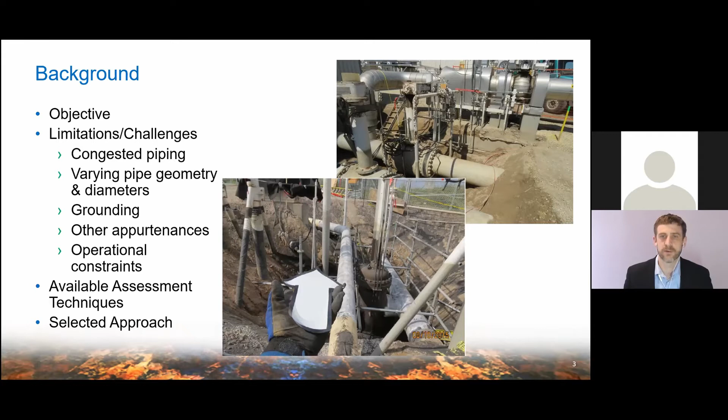So that sort of leaves the ECDA type approach, and that's the approach that was selected. It does have challenges with grounding, it has challenges with congested piping, but they're less fundamental issues in terms of being able to actually do them. So we'll look at what those challenges are in the coming slides. Now the ECDA is described in NACE SP 0502. It's a 4-step process. Many of you would be familiar with it.

The pre-assessment is going to be a little different than on cross-country pipelines. Fundamentally, it's the same process, but there tend to be a lot more changes in a facility environment than there are on cross-country pipelines. So you may have multiple revisions of drawings, multiple iterations of compressor station A, then you add B, then you add C, then you take A out of service, and then you add aftercoolers. There are a lot of things that can happen, and all of those can involve piping changes, or you add new lines and you're changing the configuration of the piping. So capturing that takes extra effort, shall we say.

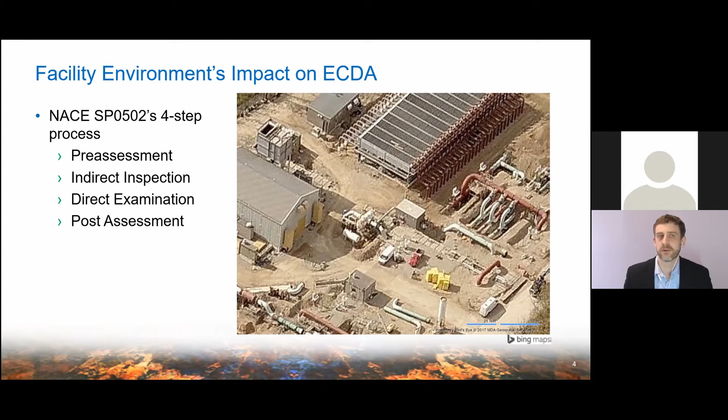The indirect inspection, we'll talk about some of the challenges in the coming slides. The direct examinations, they eliminate some of the challenges that you would normally experience with landowners and land access, but they introduce other challenges related to the environment. So you're going to be doing mostly or exclusively hydrovac excavations. You're going to be near buildings and have to worry about the integrity of those, not having much space when you're doing the digs. And then the post-assessment process is going to be similar, except it'll be based on the results from the other 3 steps.

Now, there were 2 small stations that were selected as a pilot program. And this is looking back 7 years now, but as I mentioned, the data that we have and the photos have been approved for public consumption. So that's really helpful to be able to share the findings. And it turns out that the pilot program was selected very well. So some of the challenges that we were looking at were represented in, for example, this slide here. So you can see we've got congested piping, we've got valves, there's isolation in these areas. Yes, it's a relatively small station, but it has those characteristics. It's got electrically continuous grounding as well.

Now, as a bit of background, when we were approached to do this, it was about a year or 2 after we were approached by a client to do compressor station surveys, CIPS and DCVG surveys in a compressor station. And at that point, we told the client, you're not going to get any useful data, but we can do it if you want. And they said, yeah, we know we're not going to get useful data, but we want to do it anyway. And we said, well, okay, we'll do it for you, but you're not going to get any useful data. And we did it, and they didn't get any useful data.

So then when we were approached again and they said, hey, there aren't really other good options, what are we going to do? And we said, okay, well, let's give it our best shot, and we'll look into leveraging our experience with stations. We've done a few surveys on the risers coming into stations. We know that the gradients are crazy. So we had to plan really carefully. And they also wanted a pretty quick turnaround. They basically wanted to dig right after doing the survey. So that was a bit of a challenge as well.

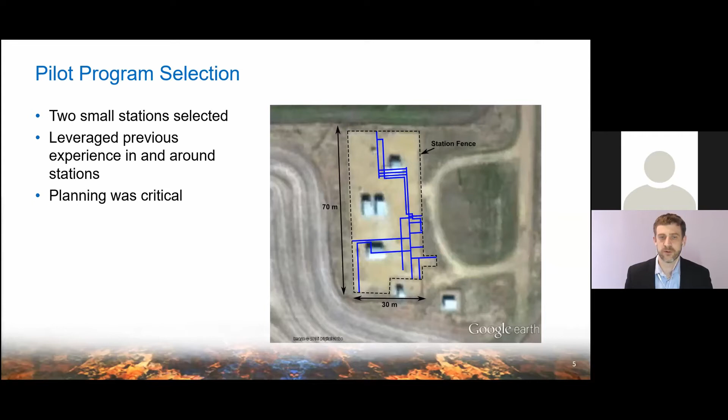So here are some of the challenges; it's really different than doing a cross-country survey. Cross-country survey, you've got issues with land access. You may have rivers and swamps and crossing fields with crops and that sort of thing. Here you don't have any of those challenges, but you have a very complex environment.

You may have ground contact issues if there's a lot of gravel. Some stations have a pretty thick layer of gravel in some spots in the stations. And you can see here, this is not so unusual. There are a lot of risers. The risers represent valves or blowdowns.

And these supports, for example, is this support contributing to a coating defect indication? You really have to find that out when you're on site because you can't tell after the fact. So skill of the technicians is absolutely critical to the success of this type of survey.

And it's critical that the technicians maintain a good awareness of the surroundings. So they need to know what's going on. They need to recognize if there are problems or potential problems, and then they have to act on them right away. The survey in a small station like this might take a day. So you need to be able to respond quickly, and you certainly don't want to come back because remobilizing is going to increase your costs dramatically.

But the office staff also need an awareness of the surroundings. So the tech not only has to pay attention themselves, they need to be able to convey that information back to the office. And then the office needs to provide prompt feedback because they're going to have a different visibility on the data, and they're going to need to be able to ask for more information, for clarification. The best technician can't see that as you have different gradients interacting. So it's really a team project, and both teams need to be on their game.

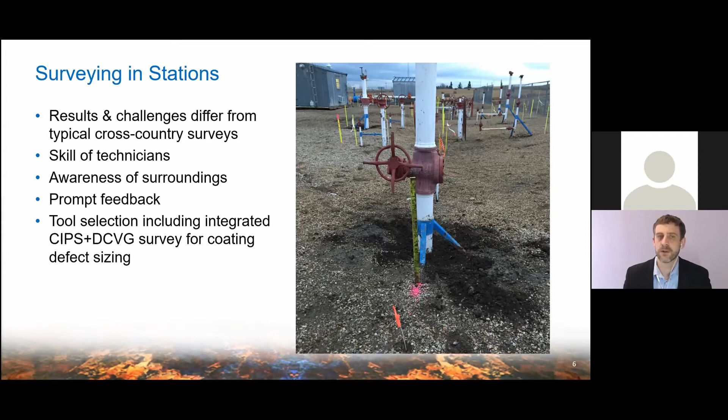Let's talk now. We're going to pivot a little bit. I want to give you some background on these techniques, the CIPS and the voltage gradient surveys. So the relevant NACE standards are TM0109, SP0502. For the ACVG and the DCVG, I've listed the ECDA standard here, but it's actually the old version because it gave some guidance for how you would classify indications.

And part of your job as the ECDA practitioner is to classify indications. And the old standard gave some guidance. The new standard pulled it out when the survey procedures got pulled out. So there's a little bit of a gap there, but you can refer to those documents.

Now, in terms of the voltage gradient test itself, this is basically the setup. You attach to your pipe and you apply a DC or AC voltage source, and then you discharge current from a temporary or permanent ground bed. And when you do that, you're going to have current which is discharged from the ground bed and picked up on the pipe. And this is basically what I'm trying to represent over here.

So this black mark is meant to represent a coating defect on my pipeline. And the blue rings and lines represent current and a voltage gradient in the soil. So around a coating defect, you have a concentration of current. That concentration of current passing through a resistive medium, soil, generates a voltage. And that voltage is what we're looking for when we do a survey.

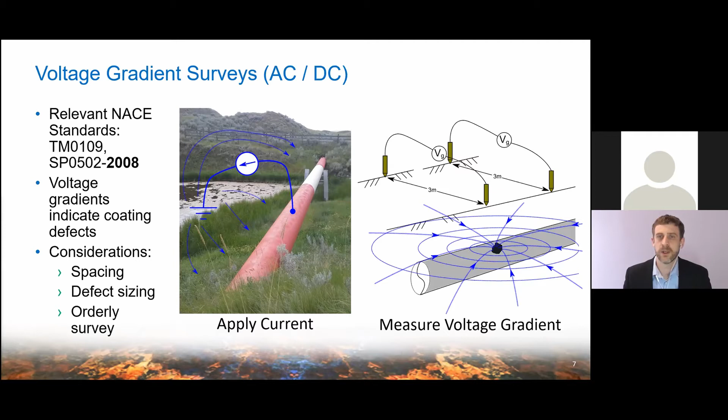In terms of defect sizing, DCVG really has the advantage in that area. We'd recommend using that. And the other thing you need to do is have an orderly survey. You need to know exactly where those gradients are being measured, because if you don't know where they're being measured, then you're going to end up with garbage data because you just can't interpret it. The gradients are very complicated in some of these big stations.

Now let's look at CIPS. The Close Interval Potential Survey, or CIS, is described in NACE standards SP0207, TM0497, and then the criteria in SP0169. And SP0169 is the criteria like the -850 millivolt CSE polarized potential criterion and the 100 millivolt criterion. And those are the things that we use for assessing protection levels.

So the CIPS is pretty much a mandatory part of any ECDA, and it's going to be really important to recognize where you have the possibility of active corrosion on your pipelines. Now, conducting a CIPS, basically it's like doing test post measurements, except instead of just setting up your reference electrode right beside the test post, you're walking along the pipeline and taking periodic measurements at some spacing along the pipeline.

So here's your voltmeter. You've got a short lead down to your reference electrode and then a long trailing wire back. And this is completing your electrical circuit for your voltage measurement. Now, a couple of important considerations for a CIPS is the soil IR drop. So if your rectifiers are on, then you're going to have current, hopefully, going to all your coating defects. And that we call the soil IR drop.

And if that's present, then instead of measuring the true polarized potential, you're measuring an on potential with an unknown error. So we want to eliminate that. And the normal way to do it is to interrupt the rectifiers. And we call that an instant off potential. It has limitations, but it's a pretty normal technique and it's a very powerful technique.

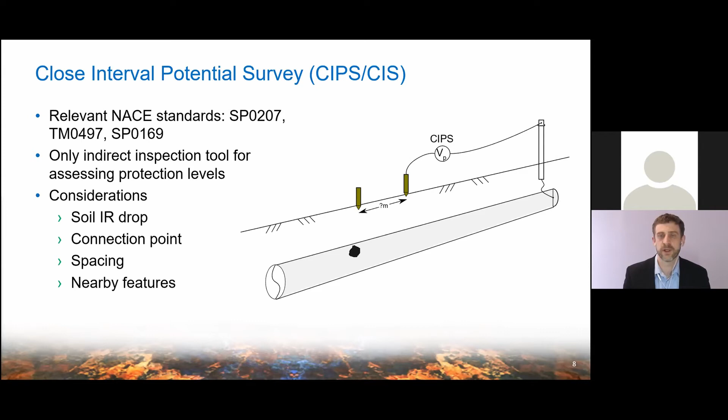So when we take that measurement, what are we actually measuring? Some of you may be familiar with this diagram or one like it. This is from CP3, and it's in the CIPS section of that course. And this is what I'm calling the 120-degree rule of thumb. So here I have my voltmeter, here's my reference electrode, and imagine shining a wide beam flashlight down from the reference electrode, 120 degrees, and then it shines on the pipeline.

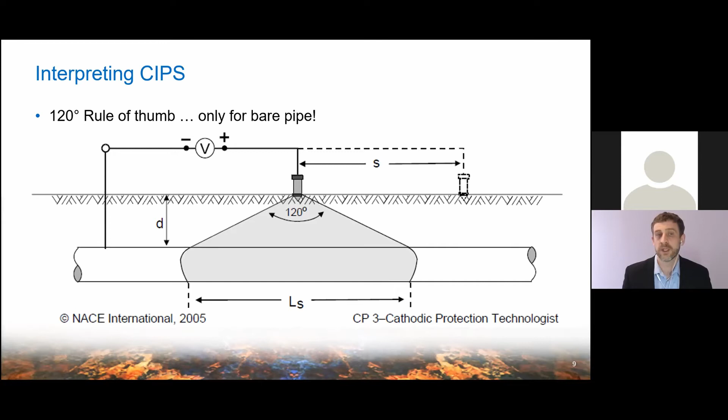So this understanding of what the reference electrode is seeing is actually only valid for bare pipe. Most of us are not dealing with bare pipe on a regular basis. So this nice rule of thumb may not be, or likely is not, applicable to your regular surveys. Okay, so what can we do?

Well, elsewhere in CP3, there is this representation of a mixed potentials approach. So here we have a reference electrode, the voltmeter, and saying the voltage you measure is related to all these different parameters. It's related to the voltage of holiday 1, the voltage, that is the polarized potential, of holiday 2, and the resistances between all those things.

And this is from an AGA report. Maybe you could find it under PRCI. The reference is down here now. It's saying E corr is this plus the difference between those two divided by R prime, which you can find the definition. And then this relationship based on all the resistances of all of these different features.

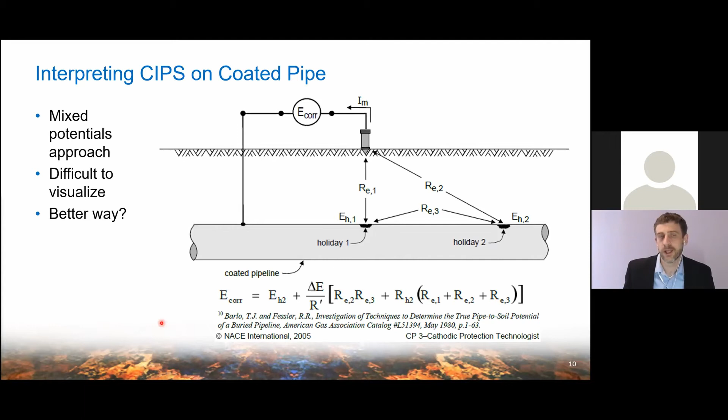And I don't know about you guys, but for me, it's really difficult to visualize this and say, well, what is the contribution of such and such feature in my potential measurement? And is there a better way? So I want to introduce to you a better way.

Now, as background to the better way is this diagram. Gummow prepared it in 1993. Pipeline steel is represented here. The coating is this dark hashing. And then this is the voltage gradient. So these are those blue lines that I showed sort of schematically in one of the previous slides. And this is a 1 centimeter diameter holiday.

And what it's showing is how far away do you have to go to get to remote Earth? Or how much of my driving voltage is consumed, how far away from my holiday? So this is interesting because it's a 1 centimeter diameter holiday. And at a distance of 1 centimeter, I've already used up 50% of my driving voltage. If I go to 10 centimeters, 10 diameters, I'm at 95% of the way. So if my driving voltage is 100 millivolts, I've used up 95 millivolts in the first 10 centimeters on this little holiday.

Now, what does that mean? It means that remote Earth comes really quickly for small defects. And that's sort of important to understanding what the CIPS is, and we'll look at that on the next slide. But it also impacts our ability to detect coating defects. So the driving voltage is going to impact our ability to detect. So will the defect size. A bigger holiday is going to be easier to detect.

The voltmeter precision and sensitivity. So do you measure to the millivolt or to the tenth of the millivolt or what? Your ability to get good ground contact. So if your reference electrode being in contact with the soil is causing a bunch of noise, a few millivolts of noise, that could easily mask a really small holiday. And then there may be some noise as well from stray current. So that sort of depends on the scenario.

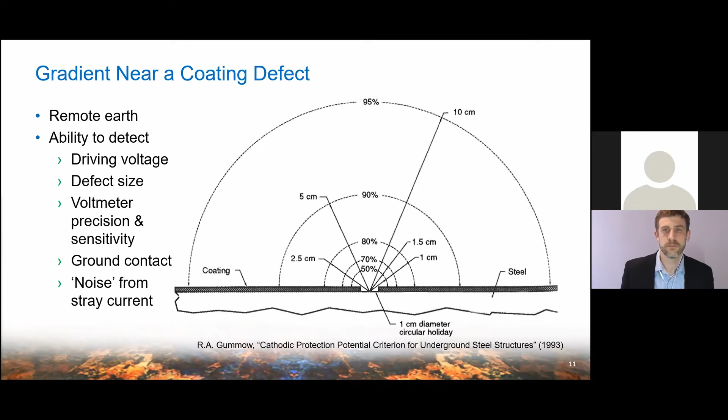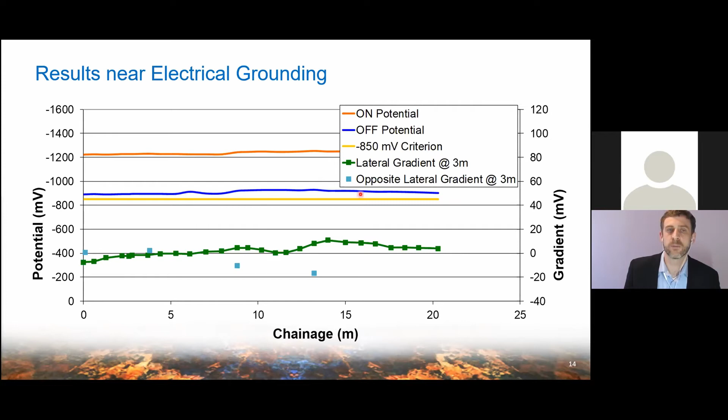All right, here's another example of some results. So the configuration here is a north-south. This is basically the main pipeline in the station, and it's got a whole bunch of T's to different laterals. So it has a valve at this location and then a bunch of T's to laterals. And these laterals have their own valves, so you can shut down those lines independently. And you can see a few things to observe. The blue line, again, protection levels. I'm fully protected in this area.

I do have a coating defect here. So this is what a real coating defect would look like. This is my 0. And you can see that both the aqua and the green points are on the same side. That's basically indicating that I've got a coating defect there, and it's showing up. Here's my sizing information. That's a 13.8% IR. That's how we size DCVG indications.

Now let's look at this one here. This is the point I'm interested in. It looks like a coating defect from one side, but on the other side, it looks like a crossing gradient. So we're going to look at the pictures in the next slide, but you can see that the magnitude of the crossing gradient is a lot smaller than is the magnitude of this gradient.

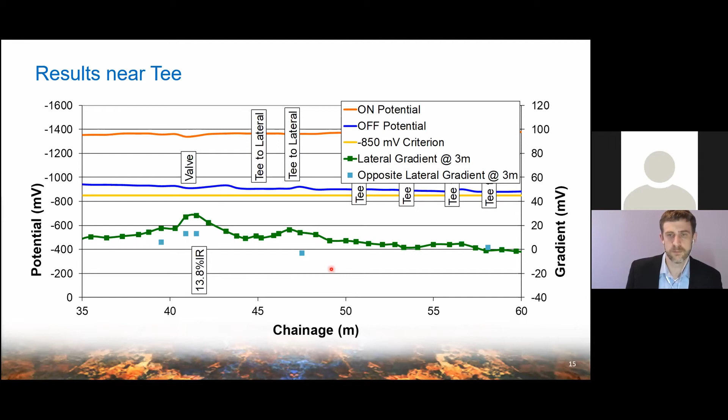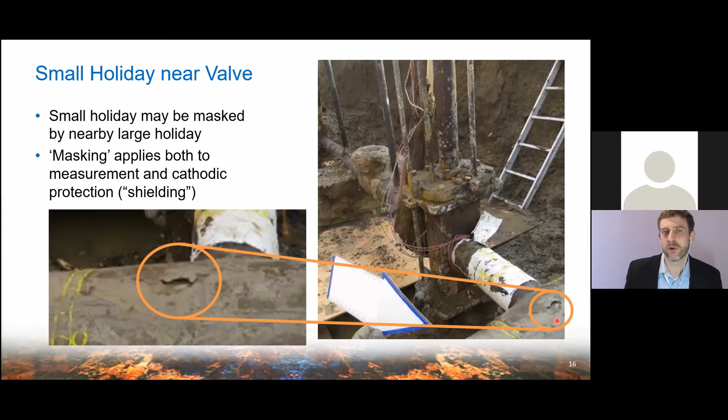So what's going on? Well, we can have what's called shielding when we normally talk about cathodic protection. Effectively, this valve is partially shielding this, and that represents itself in our DCVG data as a term I'll call masking. So you can't see this little tiny coating defect because you've got that big coating defect. Now, what's the significance of that? Well, I'm fully protected, so I guess I'm not really concerned. And in fact, when you've got a valve that's fully protected, you've got good confidence. You move a little bit away, you're going to be fully protected on the coating defect as well.

However, if you're not fully protected, then that introduces uncertainty. So the valve may not be fully protected, but you don't really necessarily care that the valve is slowly corroding. It's very thick. It's got effectively a very, very long life. However, if you had a coating defect nearby and you're unprotected, that could be problematic. So that's going to come down to an interpretation thing. You need to understand very well what the data is telling you.

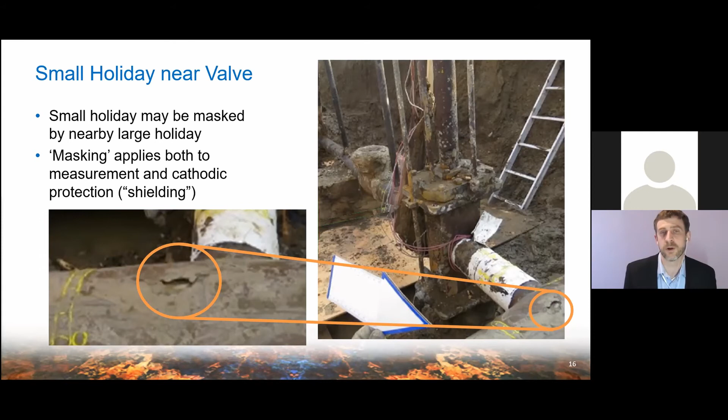All right, so this is a diagram just illustrating that scenario we talked about. We've got a small holiday. Let's say it's a 15% IR holiday. Then we've got a poorly coated valve here. So here's my main pipe, my tee to my lateral. And this is what the data might look like. If I only had my small holiday, then I'm going to have a coating indication like this. It's a little peak with my aqua on the same side.

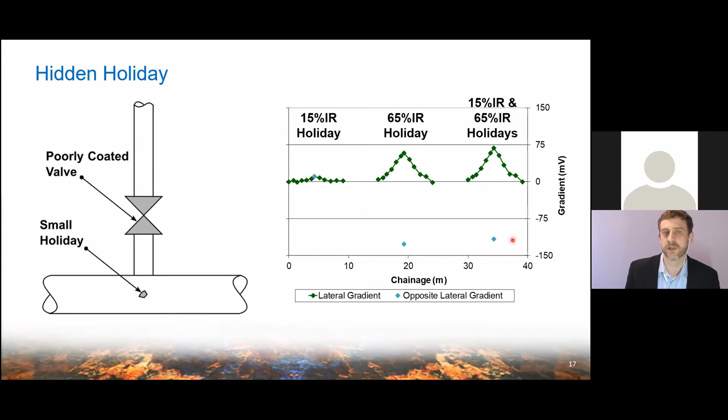If I've just got that big holiday on the poorly coated valve, it's going to be a much bigger peak and I'll have a cross gradient there. Now, if they're both there, you can see that there's actually very little difference between the two cases. So I add both holidays and it's basically indistinguishable. So then you need to say, well, what is the significance and treat it appropriately.

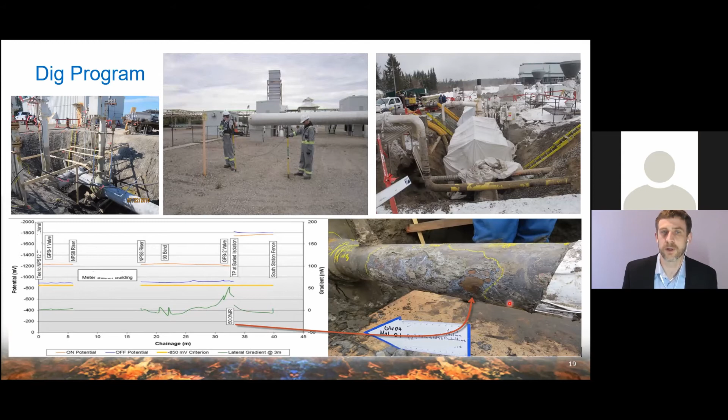And in conclusion, I'd say that the coating defects have correlated pretty well with the DCVG indications. So overall, the program has allowed the facilities to gain a lot of confidence, people to gain a lot of confidence in terms of, do we have a problem in our facilities? Can we effectively isolate it with these techniques? And there were a lot of digs that went into gaining that confidence.

Now, there definitely are challenges around valves and risers. They complicate things and they need to be accounted for carefully. And you won't have the same degree of confidence sometimes that you would have on a simple survey on a cross-country pipeline.

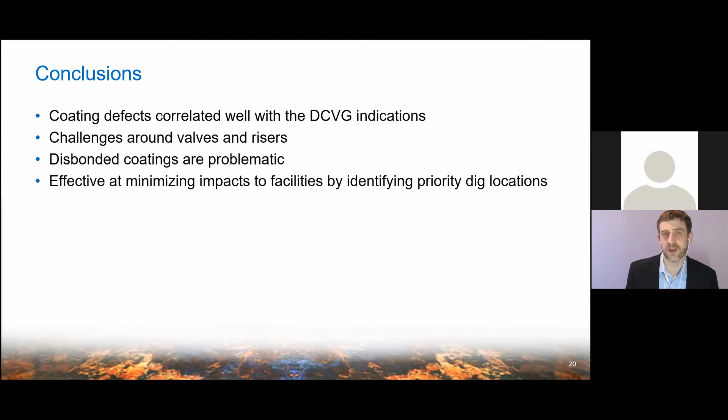Nevertheless, you still get a pretty good understanding of what's going on. Disbonded coatings are still problematic, and because you have so many different types of coatings and there may not be a lot of certainty on your coatings, that can be an issue. But overall, the program has been effective at minimizing the impacts to facilities by identifying priority dig locations and also proving out the integrity of the facilities, which is the overall objective.